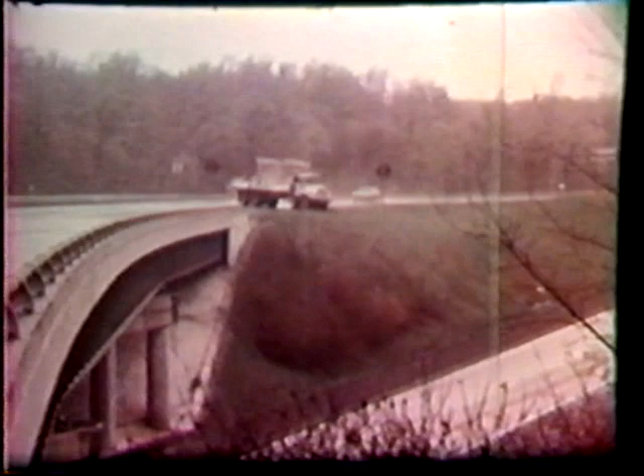Watch the Volkswagen. Now keep your eye on this truck. This could have caused a multi-car accident on the lower roadway. Only great good fortune prevented it. The Public Works Committee wants to know how many other spots there are like this in America. Here's another location and another day. He almost gets run into coming around and getting started again.

These films were taken by professional investigators of the Public Works Committee of the United States House of Representatives. It's our purpose this week to find out how many other places throughout America have these dangerous death traps. They can be prevented by proper engineering of highways in the first place. They can be identified where they exist, and they must be corrected.

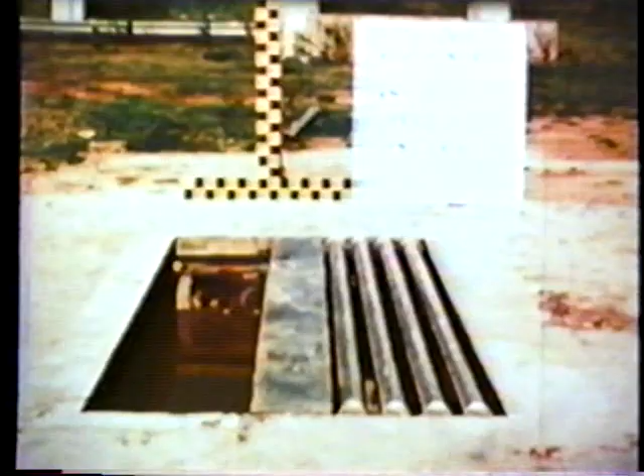This is the tests that were conducted on drainage structure to determine the opening that might be traversed by a vehicle. Here you see the Honda Civic with the 5-foot test pit that was constructed in order to attempt to measure the performance characteristics of various size openings. The 5-foot pit was considered to be sufficiently long for any testing that we might wish to do.

The basic test at this angle is 90 degrees, that was 20 miles per hour and a 24-inch opening. And the Honda Civic sailed over it with no problem at all. No tendency to be unstable, no problem with the wheel snagging in the hole.

So the pit was increased to 30 inches and the test run again. 30-inch opening, 0 angle of attack, head on, 20 miles an hour, and the Honda gets over it again with relative ease. No real problems in jumping over a hole of 30 inches.

So one more try with a 36-inch hole, but this time at 30 miles an hour, because we weren't all that sure of our testing procedure. 36-inch opening at 30 miles an hour. And the performance again was very good.

This is one of the prototype concepts that were included in the test sequence. These are 16-inch openings between 2.5-inch pipes. The 22-inch Honda wheel then might have a tendency to fall in, so we drove it across at 10 miles an hour to see if a serious problem would occur. What if the vehicle were just barely rolling? And you can see that it gets across with relative ease, really no problem in traversing the opening as much as 16 inches. Now that compares to the existing FHWA standard of 12 inches.

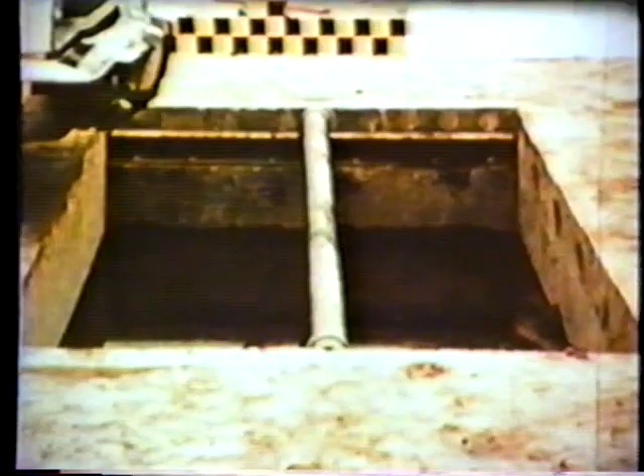This is the large car, which was kind of an afterthought. We had not intended to run the large car simply because we didn't think it would be a serious problem. But to just verify the results that we were getting, we thought we should have the 4,500-pound test vehicle. So this is the 4,500-pound test vehicle at very low speed, and low speed is the more critical speed.

And notice that the action of the vehicle is a good deal more pronounced with the heavy vehicle than it is with the Honda. The difference being the suspension system beneath the vehicle. The softer suspension system of the larger vehicle dropped more quickly, and that in turn created or translated more action to the vehicle compartment itself.

Taking these ideas and translating them to prototypes, this is a roadside pipe 30 inches in diameter, cut to match the side slope with an apron around it for erosion protection. We're going to run the vehicles across this 30-inch opening with 90-degree attack angle to see what effects it might have if there's a serious problem damage-wise.

And this time the 4,500-pound vehicle goes across with virtually no problem at all at low speed. And low speed is typically the more critical case. This is looking down the throat of the system, and the flash is simply film coordination.

You can see the wheel drops very quickly, and the tire does impact the rim on the backside, and there is a loss of tire pressure in one of the tires. But all in all, the driver came across relatively unscathed in the impact. Very modest damage occurs to the vehicle.

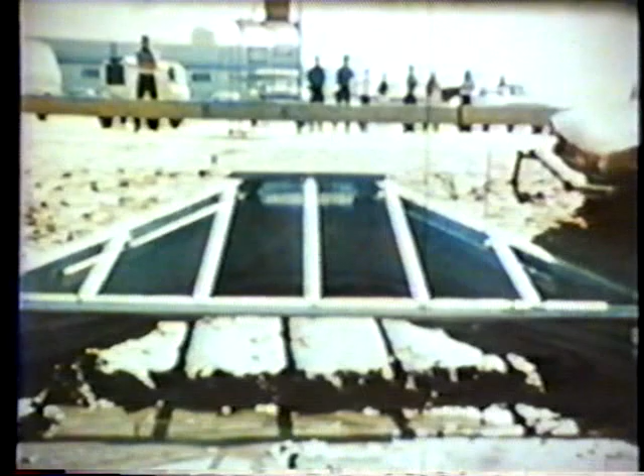We're coming across at 90 degrees with the intent of seeing if the vehicle can survive the impacts of a 30-inch pipe spacing on a relatively extended opening. The speed is approximately 30 miles an hour.

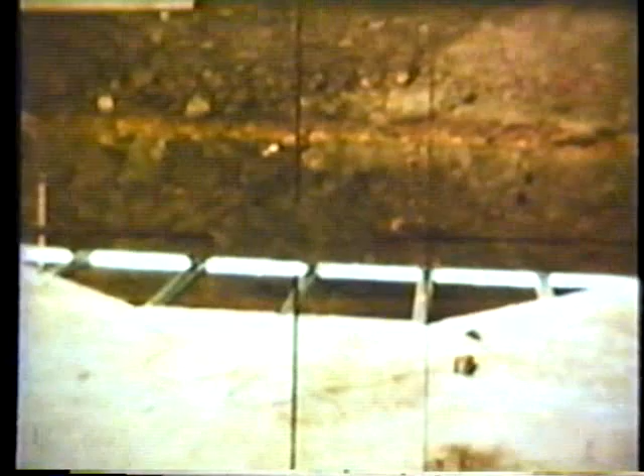This is looking down from the top, and you see the action of the axles as it comes across the system, and by far the most violent action is the rear axle in the process of traversing across the 30-inch openings of the grate.

Same test with the larger car, this time at about 20 miles an hour, and the project requirement was to try to steer back toward the roadway to see if that would have any effect on the traversal pattern. So you notice they've already started counter steering at this point. The vehicle does clear across, but the rim is bent, and pretty obviously the tires are flattened in the process of the traversal.

While that's not the most desirable way to get across, it is certainly safe. And that's the intent, to get away from the stand-up head wall, concrete that we've used for so long, and match the box culvert to the side slope with a grate with large enough openings to provide for passage of most debris, solve the hydraulics problem, and still be survivable by the motorist.

This is the high-speed test of the drop-off situation at the end, just to prove conclusively that it can't work. And it does so very dramatically. As the vehicle drops off of that end, it simply rotates, and when the wheels impact the soil in the ditch, it's tripped and rolled.

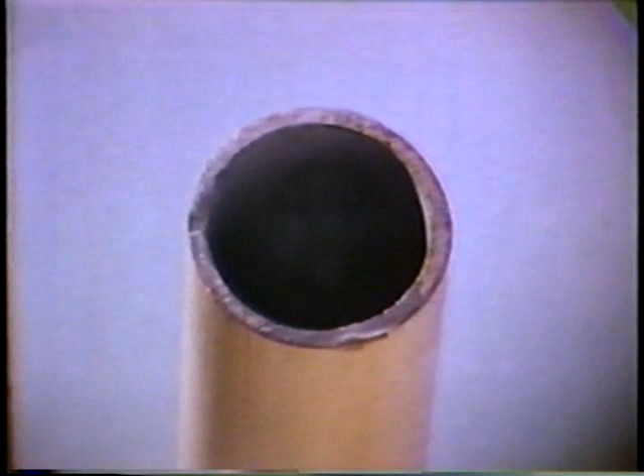A survey was conducted in the initial phase of this study with state, city, and county agencies to determine the state of the practice in small sign supports. Follow-up phone calls and personal interviews were made with selected transportation officials to fill voids in the questionnaire data. The 4 most common types of small sign supports are, in order of use, the steel flanged channel or U-post, wood post, standard steel pipe post, and square steel tube post.

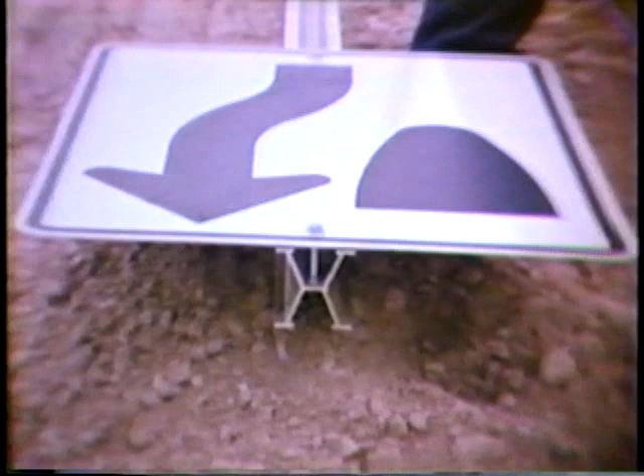Shown here are field installations of the steel U-post, a support widely used by state, city, and county transportation agencies. In some cases, 2 U-posts are bolted together to form a larger support, and these are referred to as piggyback or back-to-back U-posts. Typically, the U-post is driven in the ground either by hand or by powered equipment. Aluminum posts, similar in shape to steel U-posts, are also used to a limited degree. This is a Type X aluminum post.

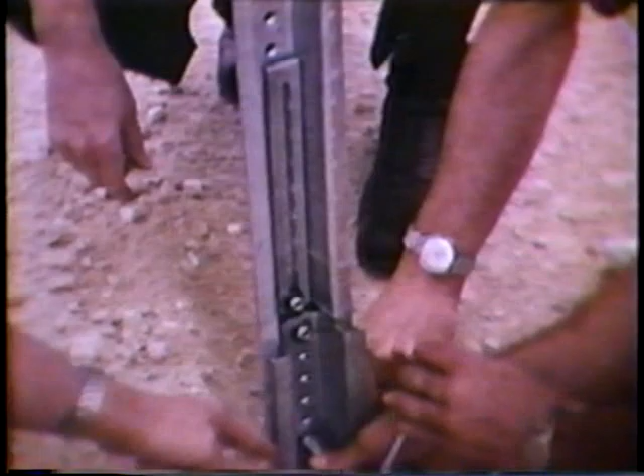A relatively new concept designed for use with steel U-posts consists of a signpost-stub post combination with a bolted base assembly. Installation is accomplished by first driving a stub in the ground. Then the signpost with sign attached is bolted to the stub. This system has an advantage over full-length U-posts in that it can be installed from ground level and requires no special equipment.

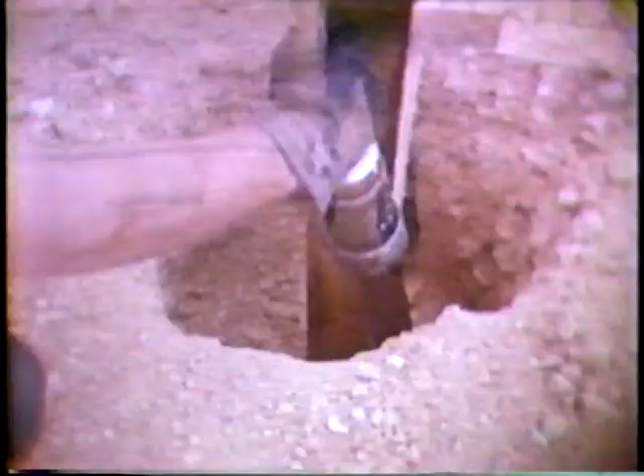Wood posts are widely used by state transportation agencies. Douglas fir and southern pine are the most common types of wood used. Wood posts are typically placed in a drilled hole, and excavated soil is then tamped around the post for embedment. In some cases, wood posts are mounted in concrete footings. In this case, a metal sleeve is used with the concrete footing to facilitate removal of the stub if the post is knocked down. Holes at the base of the post reduce the impact force when the sign is struck by a vehicle.

Standard steel pipe is used by several states and many city and county agencies. Aluminum pipe is also used, but to a smaller extent. Pipe posts are sometimes placed in a drilled hole, and excavated soil is tamped around the pipe for embedment. Pipe posts are also driven, and in some cases are placed in concrete footings. When embedded in the soil, vanes are sometimes welded to the base of the pipe for torsional or twisting resistance.

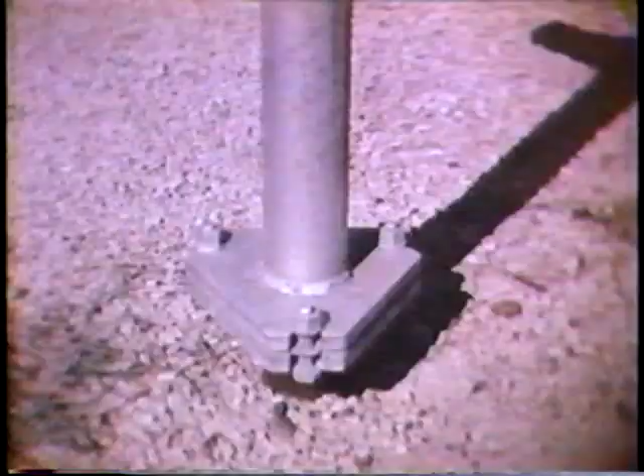The breakaway slip base is also used with pipe posts, and in some cases with square or rectangular tube posts. The triangular slip base will break away irrespective of the direction of impact, while the rectangular slip base is primarily a unidirectional device.

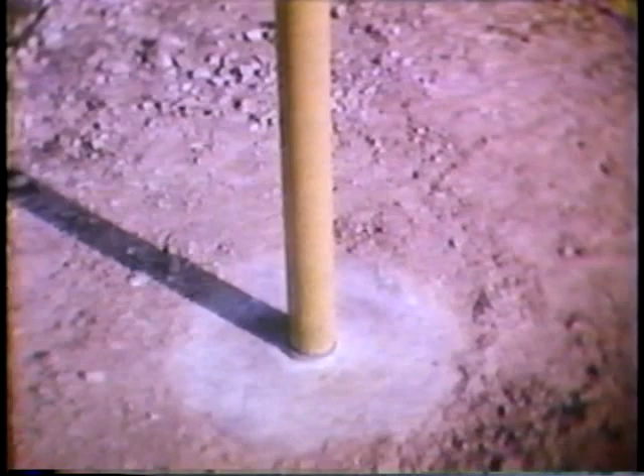Another method which has been successfully used to weaken the pipe post during impact is the so-called pipe collar design. A short pipe stub is embedded in a concrete footing with a threaded pipe collar attached. The threaded base of the signpost is then attached to the collar for installation. The system is designed to break at the juncture of the collar and the signpost.

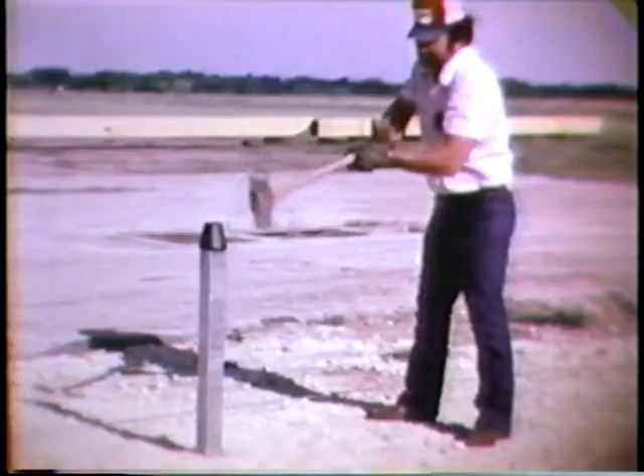Square or rectangular steel tubing has gained wide acceptance in recent years as a small sign support. It is widely used by state, city, and county agencies. Installation is typically accomplished by first driving a stub post, which is larger in size than the signpost. The signpost is then inserted in the stub and held with a fastener. For smaller post sizes, a sleeve is inserted along and on the outside of the stub to provide greater strength at the base of the post. Vehicle impacts cause the signpost to bend and/or break at the top of the stub.

The second phase of the study involved a full-scale crash test program to evaluate the impact hazard of widely used small sign supports and promising new concepts. All installations tested were the single signpost type. In accordance with current guidelines, compact automobiles weighing approximately 2,250 pounds were used as test vehicles. The posts were impacted either 15 inches to the left or right of the center of the front bumper.

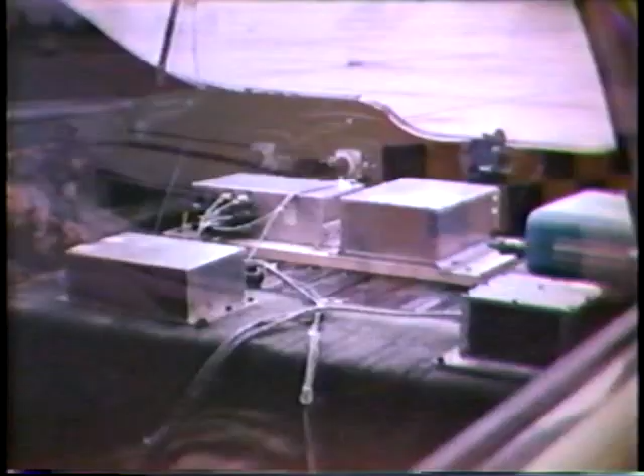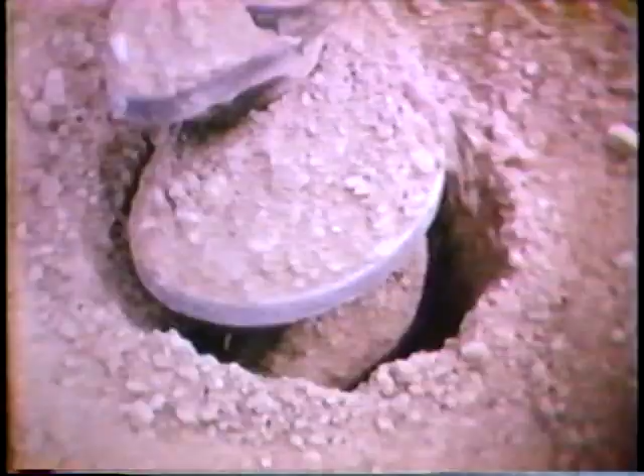Each test vehicle was instrumented for measuring deceleration during impact. Soil at the test site conformed to recommended standards for crash tests. With regard to safety, change in vehicle momentum during impact is the primary factor used to evaluate the impact behavior of a signpost. The American Association of State Highway and Transportation Officials specification states that the change in momentum for a 2,250-pound automobile should not exceed 1,100 pound-seconds, but desirably does not exceed 750 pound-seconds.

This means that the change in velocity during impact should not exceed 10.7 miles per hour, but desirably does not exceed 7.3 miles per hour. Also, after impact, the panel and/or post should not penetrate into the passenger compartment, and the vehicle should remain in a stable, upright configuration. Aluminum sign panels were used in each test. A 24 by 30-inch panel was used with the smaller posts, and a 36 by 48-inch panel was used with the larger posts. The bottom of the panel was approximately 6 feet above ground in each test.

The first series of tests involved full-length steel U-posts. This is a 3-pound per foot rib back post driven 3.5 feet into the soil. It is rolled from billet steel, having relatively high strength and toughness. Tests at 21 miles per hour and 61 miles per hour were conducted. This is the 61 mile per hour test. Note that the post momentarily wraps around the hood of the car, producing significant impact resistance. Change in momentum exceeded the desirable limit.

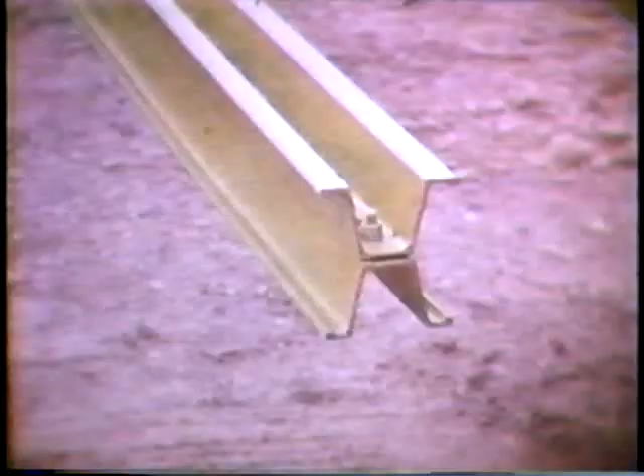Tests were conducted on two 3-pound per foot steel U-posts bolted together to form a back-to-back section. The posts were embedded 4 feet in the soil. This is a 61 mile per hour impact with the rib back billet steel design. Change in momentum was well in excess of the limiting value.

As a consequence of the previous test, an experimental billet steel U-post was produced by a manufacturer of this design. Material properties were changed to reduce the impact resistance. This is a 58 mile per hour impact with the experimental back-to-back post. Much better impact behavior was observed, and the change in momentum was below the desirable limit. Damage to the vehicle was considerably less than in the previous test.

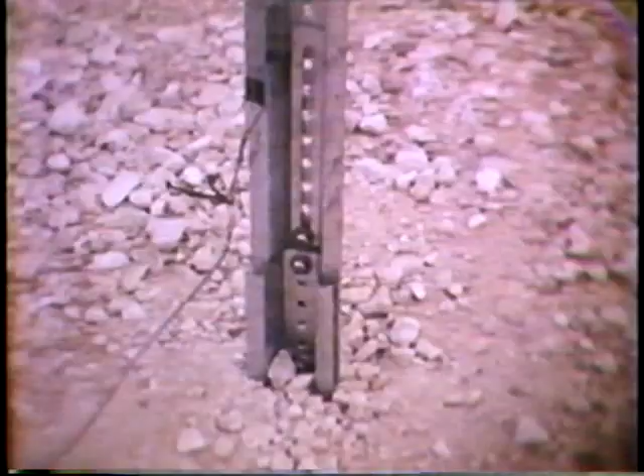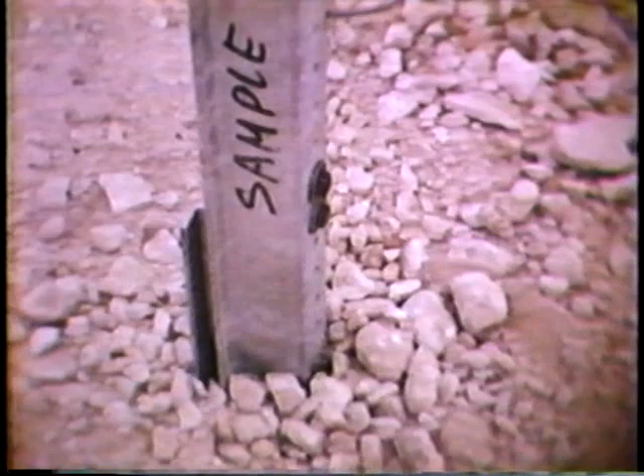Tests of a bolted signpost stub support system utilizing steel U-posts have been conducted by industry. This is a 3-pound per foot rail steel post and stub, and the stub was driven approximately 3 feet. Impact speed was 60 miles per hour. Change in momentum was well below the desirable limit. Other tests have been conducted to evaluate the behavior of the system for low-speed impacts, as well as impacts from the side and rear of the installation. Change in momentum was well below the desirable limit in each case.

Subsequent to these tests, design changes were made in the bolted assembly to reduce damage to the stub. Further tests verified the improved design. Note that damaged posts can be salvaged for use as stubs on other installations.

The final series of tests involving steel U-posts were conducted on a braced leg design. Two 2-pound per foot posts are driven in the ground to form the support system. Tests at 20 and 61 miles per hour were conducted. This sequence shows the high-speed test. Change in momentum was below the desirable limit in this test and slightly above the desirable limit in the low-speed test.

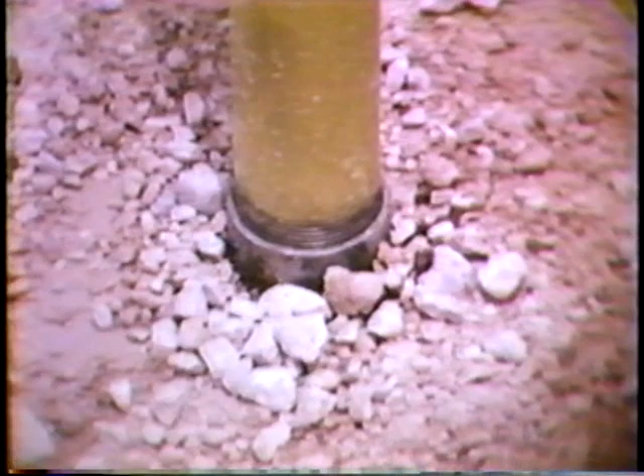Tests were conducted to evaluate a 2.5-inch pipe with a breakaway collar design. In the first 2 tests, the system was impacted at 20 and 63 miles per hour. This sequence shows the high-speed impact. Change in momentum was less than the desirable limit. Note the stub broke just below the collar, and the entire support would have to be replaced.

A minor change was made in the embedment procedure to reduce impact damage. A subsequent test at 20 miles per hour verified the improved design. Change in momentum was below the desirable limit in the 3rd test. With a change in the embedment procedure, the signpost broke just above the collar, and only the signpost would have to be replaced.

The final test involved a square steel tube post. A 2.5-inch square 10-gauge post was embedded in a 3-inch square base. Impact speed was 61 miles per hour. Change in momentum was less than the desirable limit. Damaged posts in this system have salvage value since they can be used as bases for other posts. Recent crash tests of this system by industry have proven it meets current safety criteria for a variety of single post size configurations.

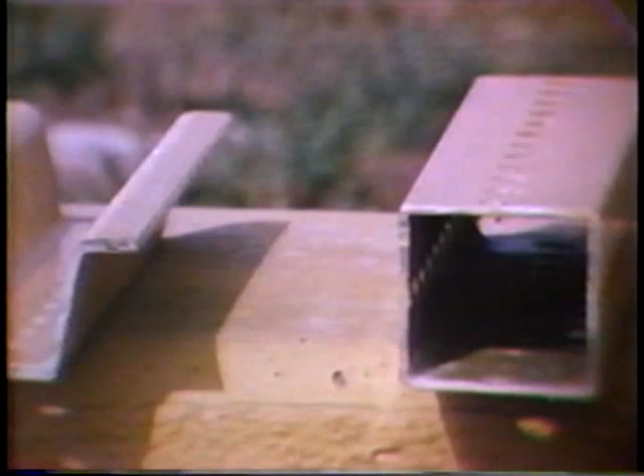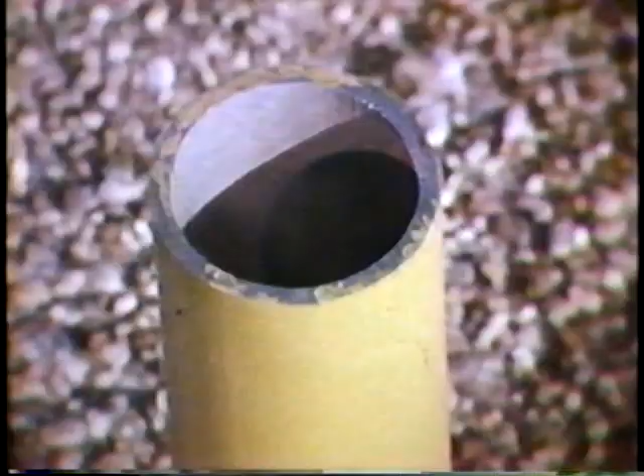In summary, 2 single post systems were found to be unacceptable in terms of current safety criteria. These were 2.5-inch inside diameter and larger standard steel pipe having no breakaway or weakening device, and 2 3-pound per foot and larger billet steel U-posts bolted back to back. Although a back-to-back rail steel post meets safety criteria, it is marginal at best, and a more crash-worthy system should be strongly considered.

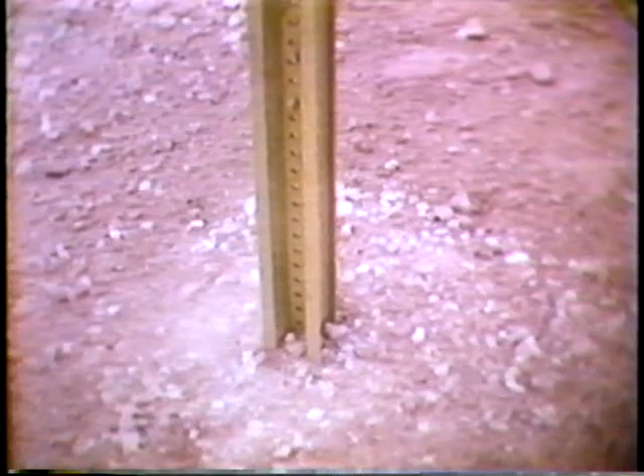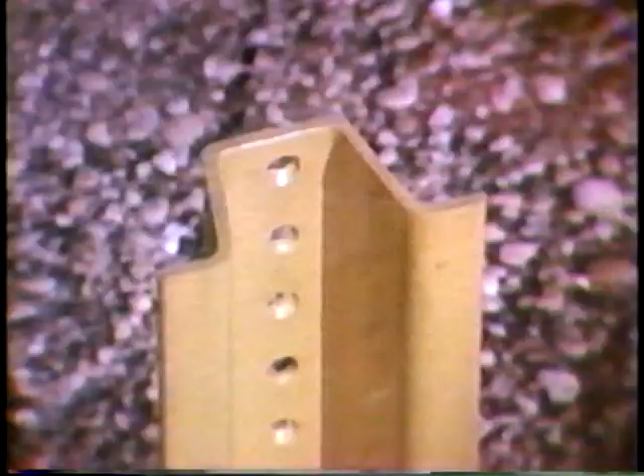2 systems were found to be marginal in terms of current safety criteria. By marginal is meant the change in momentum was above the desirable limit, but below the maximum limit. These were the braced leg design with 2 2-pound per foot billet steel U-posts and the 3-pound per foot full-length billet steel U-post.

Single post systems which satisfied the AASHTO safety criteria included the 3-pound per foot rail steel U-post or its equivalent, the bolted base rail steel U-post system for post sizes up through 4 pounds per foot, wood posts up to 4 by 6 inch in size with no breakaway or weakening device, standard steel pipe up through 2 inches inside diameter in size with no breakaway device, standard steel pipe up through 2.5 inches inside diameter in size with the breakaway collar design, square steel tubes up through 2.5 inch by 2.5 inch 10 gauge in size, and the Type X aluminum post up through the 3X in size.

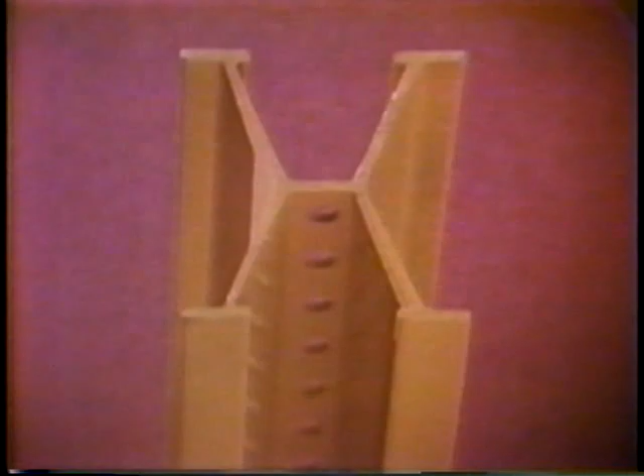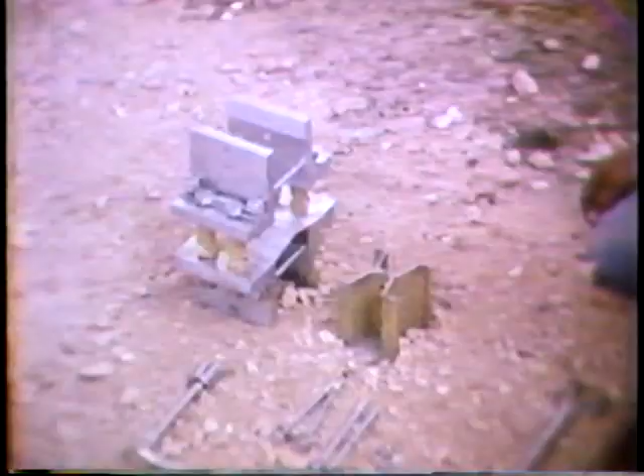Although not tested in this study, it has been proven that the slip-base breakaway design will meet required safety standards for a variety of post types and sizes. Tests have shown that this is another acceptable device which reduces impact severity. It utilizes a coupling and load concentration design which is adaptable to a variety of post types and sizes. It can be used on new installations or can be used to retrofit supports which do not meet current standards.

In the final phase of the study, procedures and guidelines were developed to assist transportation officials in selecting a small sign support system. As outlined in the guidelines, each candidate system should be carefully evaluated in terms of safety, design, and economics.

Regarding economics, the guidelines address the following: initial cost of system, annual cost of components, annual costs to install new systems, annual costs to restore systems damaged by errant motorists, and annual costs associated with maintenance, such as painting of posts. Careful consideration should also be given to manpower, equipment, and expertise needed to install and maintain a system.

Cost effectiveness of the various systems presented is a function of a number of factors. Since many of these factors vary with time and geographic areas, it is essential that selection be based on values applicable to the given locale at the time of the analysis. As you have seen, there are a variety of ways to support a small sign, some obviously less hazardous than others. Some are simply not acceptable.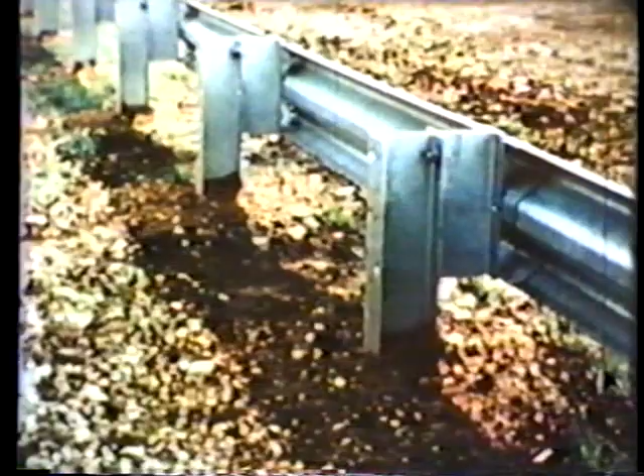This series of tests was conducted to see how barriers perform when they're down on a side slope. The test situation is a 6-to-1 side slope, and the barrier is located 6 feet from the break point. There is a 6-foot berm off of the edge of the concrete, and then a 6-foot run out to the face of the barrier. So the barrier on a 6-to-1 slope is 1 foot lower than the normal configuration. 4,500-pound vehicle, 25 degrees and 60 miles an hour, simply goes right over the top.

And looking at the test situation in high speed, notice that the rail leans back, and as a result of that leaning, the wheel gets on the face of the barrier and it ramps the vehicle up and over. After this test was conducted, a follow-up test at 15 degrees and 60 miles an hour was conducted to see if redirection could be achieved for the normal impact angles. 25 degrees is an extreme angle and would not occur in normal practice very often. So therefore the question boils down to, would we have to go out and replace those barriers on a 6-to-1 slope, or are they relatively functional for normal impact angles?

So this is 15 degrees and 60 miles an hour, the so-called severity test, 4,500-pound vehicle, and we do get redirection, and it was a positive redirection, but a little bit more violent than we would actually desire. We would prefer the vehicle go down the barrier face rather than being thrown back across the traffic stream. Remember, this is the severity test rather than the strength test. The strength test is redirecting the vehicle with no penetration behind the barrier. This particular test is concerned primarily with the forces on the driver. Obviously, penetration or ramping over is not desirable either.

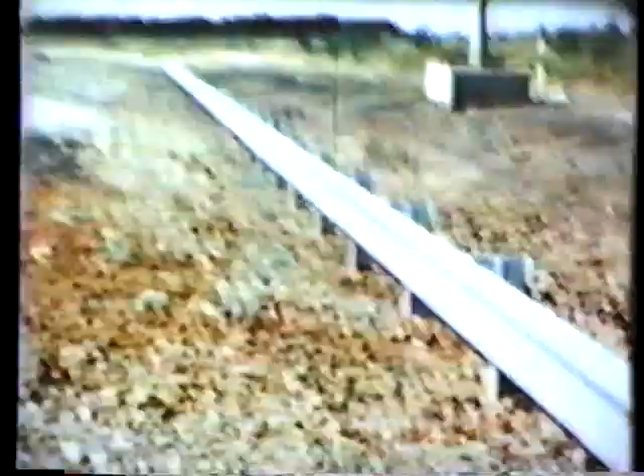Now we've moved the barrier out to 12 feet down on the side slope, or 2 feet lower than would be the normal mounting height at roadway level, and the 25-degree 60-mile-an-hour impact is to take place. The idea was the vehicle is too high when it impacts the first barrier, and therefore moving it out will cause better redirection because the vehicle would be closer to the ground. Notice that a better redirection did occur, but it became a very violent collision, and we will look at this in more detail later on.

At this point you see it is snagged on the rail, and out comes the axle and wheel from the right side of the vehicle, indicating a very severe impact with the barrier. What inadvertently occurred was a 1-foot W-beam section that's designed to go at the intermediate post on the 12-foot 6 rail section was omitted, and the vehicle impacting the barrier bent the W-beam around the blockout and simply cut it in half. The vehicle then snagged on the post and rail end and ripped the undercarriage apart. This demonstrates, I think, conclusively the need for that 1-foot backup section.

There you see one from adjacent post laying on the ground, but the break point did not have that 1-foot backup section. This is a small car with the same basic setup in the 12 feet out from the break point, or 2 feet lower than normal, 15-degree impact at 60 miles an hour.

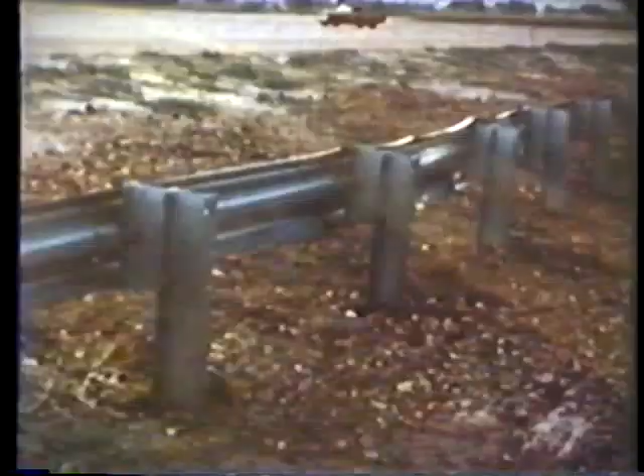This shows you the relative damage to the rail for the lighter vehicles is very modest as compared to the previous damage from the heavier vehicles. Again, the vehicle trajectory after impact was rather extensive, even though the damage to the vehicle was relatively minor. The trajectory problem is a far greater concern than the damage to the vehicle itself.

This is the other idea that we had. If the rail was leaning and causing the vehicle to ramp over the top, then one method of correcting that would be to go to a flexible system. In this case, the cable J-hook roadside barrier. In the concept, the cables are located at 30, 27, and 24 inches above the ground, respectively. The idea is the cable should intermesh with the sheet metal on the side of the vehicle and create redirection.

60 miles an hour, 25 degrees, and notice that we got good redirection down to the time that it impacted the end anchorage. This is not an operational end anchorage, but is an experimental test facility, and the end anchorage was one that provided good tension in the cable. Notice that only one of the 3 cables engaged the vehicle. The other 2 went under the vehicle. But only one cable was necessary to provide the redirection.

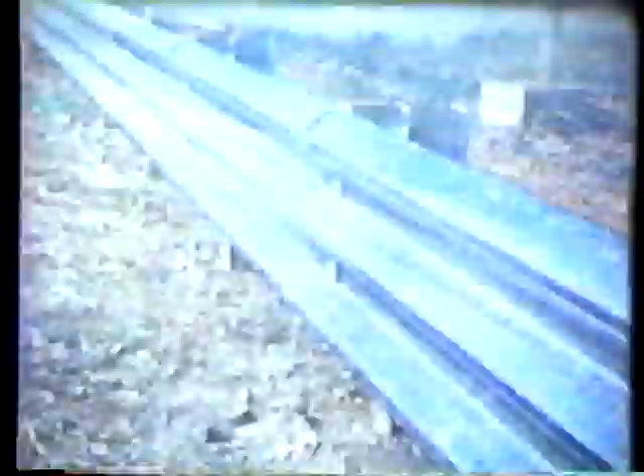This is the Thrie-beam barrier, which is mounted at 32 inches above the terrain and 6 feet off of the basic break. The impact will be with a 4,500-pound vehicle running 60 miles an hour and with an angle of 25 degrees to the barrier. The idea that the taller barrier would intercept the vehicle more effectively and redirect the vehicle was proven to be ineffective. Raising the height didn't solve the problem. Again, if you watch the right front wheel, the barrier leans back, the tire gets on it, and the vehicle simply ramps right up and over it.

So metal beam barriers must be on very flat terrain in order to be effective for the strength test, the 25-degree, 60-mile-an-hour test. The locations that exist on 6-to-1 or flatter are relatively safe. We don't recommend pulling and replacement, but for steeper slopes, it would be appropriate to replace those barriers on the slope as quickly as it's practical to do so. This shows you the damage that has occurred and the ramping action that occurred, and that little bit of lean is all that's necessary to get the vehicle up and over the top of the barrier.

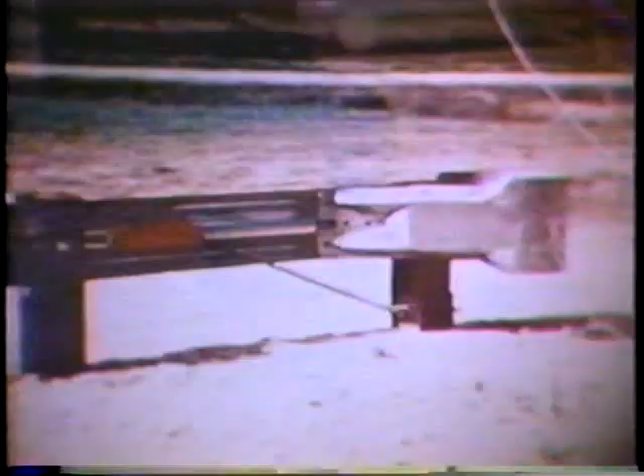Note particularly that the front wheel passes directly over the second post, and as the rail fails to come down, the vehicle right side is elevated and rollover occurs. The BCT was designed to try to eliminate this particular problem. The concept was a relatively weak beam supported tensile strength-wise by a cable coming down from the rail through the first post. On frontal impact, the post would break, the cable would be released, and the rail would buckle in front of the vehicle as a crash cushion.

Here you see that action. Low speed impact with a small car, the post does break away satisfactorily, and the W-beam buckles in front of the impacting vehicle. Damage to the vehicle was moderate. This is a high-speed crash with a large vehicle with the same system. And notice that rollover does occur. The force required to buckle the rail, plus the leaning action of the second post, resulted in the rollover very similar to the Texas twist design.

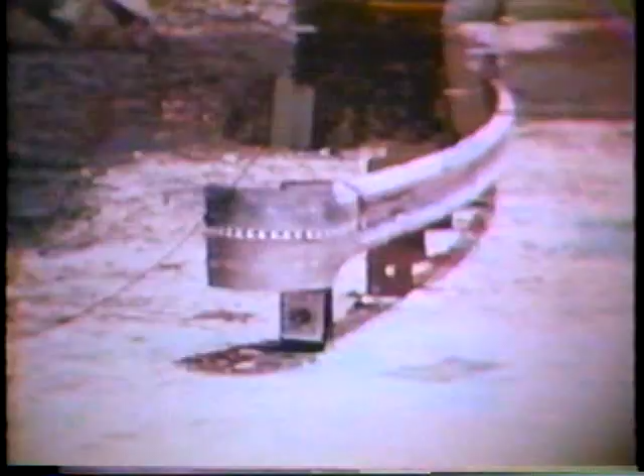Modifications of the system were made to include a hole in the second post, and the washers were removed on the second through the seventh post to eliminate the problem associated with the rollover that was observed before.

After the basic design was worked out, several high-speed crash tests were conducted with both steel post and wood post systems to determine the behavior of the end in high-speed impacts. And here you see the basic action of one such crash test in which the front quarter panel and door were ripped off of the vehicle as impact occurred. While undesirable, this impact was considered to be marginally safe. Much safer than penetration of the passenger compartment by the stand-up rail, as we saw earlier. Damage to the vehicle was very severe, and the decelerations on the passengers and occupants were marginal.

Variations in the system were then attempted to determine if we could eliminate some of the problems associated with it. And here we see a second test. The situation is a little less severe than had previously been noted. Again, the peeling action does take place. The right quarter panel is taken off, but the door remains intact. A little more rolling action than was observed in the previous test.

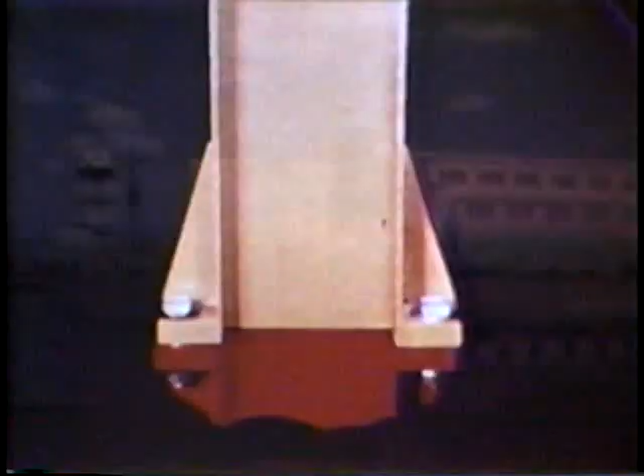Once aware of the problem, engineers were quick to develop effective solutions. Where hazards could not be removed, they were made to break away or were shielded with a positive barrier. When it was not possible to eliminate or otherwise treat a hazard, another approach was necessary. This led to the development in the late 1960s of highway crash cushions. Crash cushions are impact-absorbing devices which allow motorists to drive away from otherwise fatal accidents.

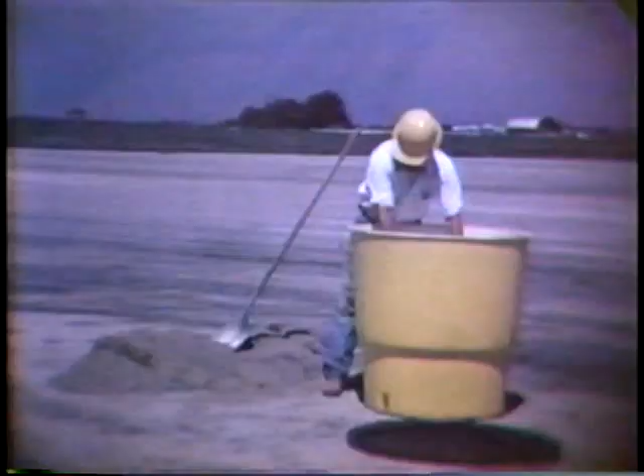The earliest crash cushions, or impact attenuators, consisted of rows of metal drums, specially weakened to crush on impact. Another type, an array of sand-filled frangible plastic barrels, was designed to dissipate the energy of an impacting vehicle through momentum transfer as the sand was displaced. Many of these early systems continue to provide life-saving service.

Still another variation employed clusters of water-filled vinyl tubes which dissipated impact energy in a controlled fashion as water was forced out through the top of each tube. The principle of water-filled tubes was expanded to become the hydro-cell sandwich system. On impact, kinetic energy is gradually dissipated through the release of water in the tubes and the compression of the hydro crash cushion.

This system is particularly useful in protecting wide hazards at gores, exit ramps, and bifurcations. The hydro system is also effective in safely redirecting vehicles which strike the unit from the side. Since the system is reusable, maintenance and repositioning are simple and inexpensive. Only the water expended in the crash must be replaced.

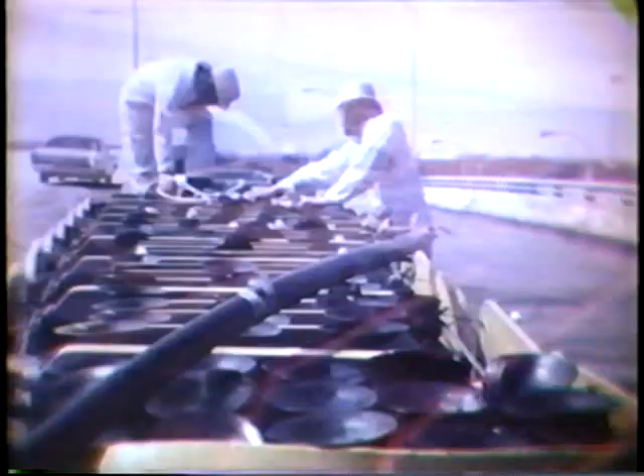The many narrow obstacles which exist along the nation's roads present quite a different problem. In order to shield these hazards, a specially designed system called the Guardrail Energy Absorbing Terminal, or GREAT, was developed. The GREAT system employs an expendable energy-absorbing cartridge in a metal framework of triple corrugated guardrail sections.

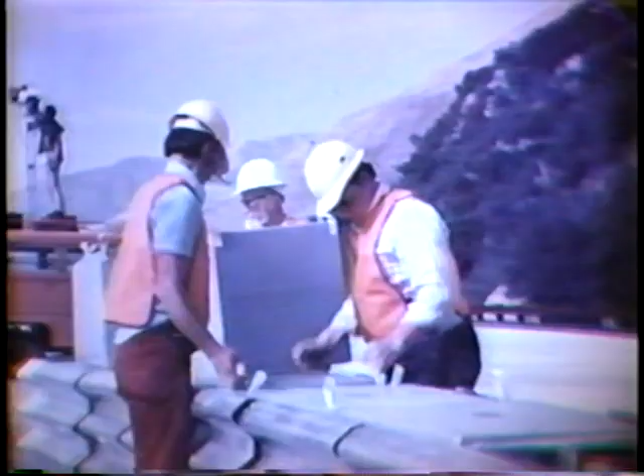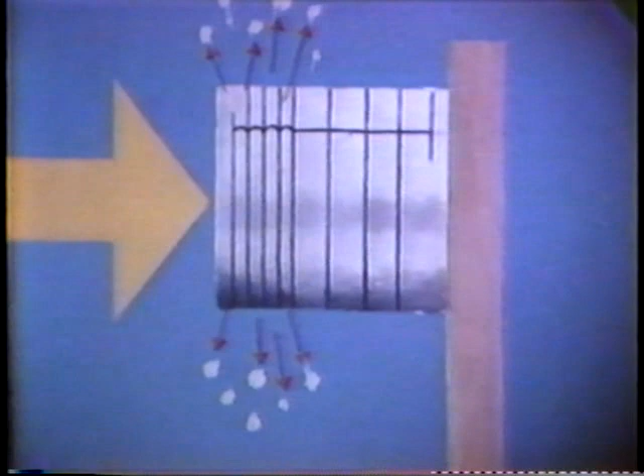When the unit is struck, its soft plastic nose molds to the front of the impacting vehicle, and the unit telescopes inward as the energy-absorbing cartridges are crushed. Expended cartridges are quickly replaced with new ones, and the unit is brought back into service. The first GREAT cartridges consisted of vermiculite concrete cells placed in a removable container. As the cells were crushed, the kinetic energy of the vehicle was converted into work, resulting in a controlled, safe stop.

In response to the growing number of smaller cars with extra sensitivity to crashes, a new energy-absorbing medium has been developed. Called hex foam, the new medium consists of a honeycomb matrix of hexagon-shaped cells filled with polyurethane foam. Layers of hex foam are encased in a polyethylene shell.

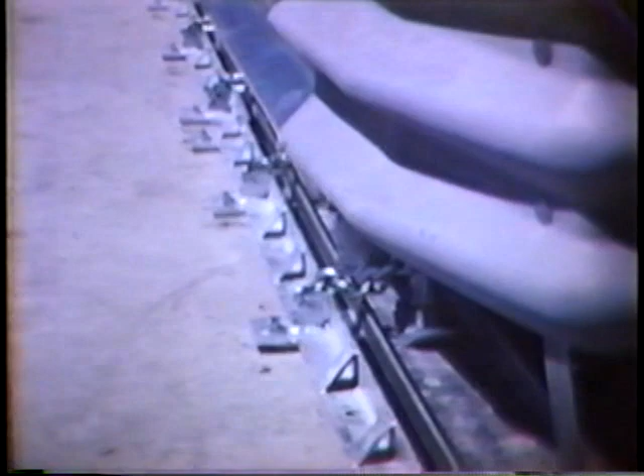In addition to solving the problem of shielding narrow roadside hazards, the GREAT system has been modified to offer protection in highway construction and maintenance zones. The construction zone GREAT has been adapted so that it is portable and can be moved along as construction progresses.

Still another development has resulted from the need for better safety for workers and motorists in construction and maintenance zones. The truck-mounted attenuator, or TMA, employs the lightweight hex foam cell as its energy-absorbing medium. Attached to a shadow truck, the TMA shields workers from passing traffic. Since the TMA is able to bring an errant vehicle to a controlled, safe stop, both the motorist and the highway worker are protected by its life-saving presence.

Whereas crash cushions are effective in dissipating the energy of impacting vehicles, other devices have been developed to aid motorists in avoiding hazards in restricted traffic areas. Portable electronic changeable message signs are being used throughout the United States to provide motorists with clear, bright traffic advisory and safety information.

More forgiving highways are being achieved through continuing research programs, products from innovative companies such as Energy Absorption Systems, and the willingness of highway engineers to adapt new techniques in the spirit of improving highway safety.

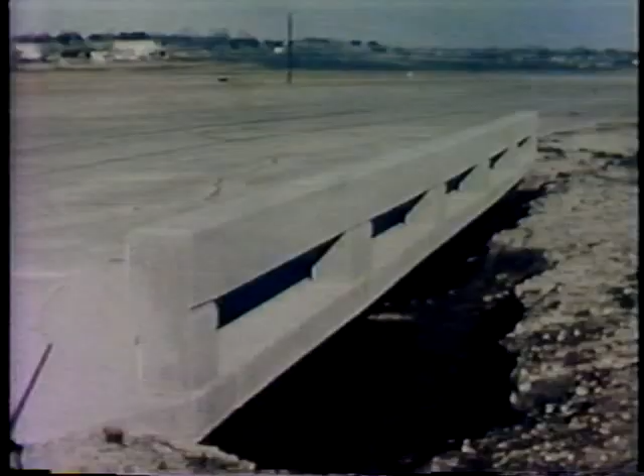A series of full-scale crash tests of bridge rails and guardrail to bridge transitions was conducted in 1984. The tests were generally conducted at the high side of the standard testing criteria. You will see that the results were severe and disturbing. These results indicate that the majority of existing bridge rails and transitions are structurally and/or functionally inadequate. These tests further demonstrate that performance standards for roadside appurtenances should be established and that testing should be conducted to assure that an approved design will function adequately.

This test is on a type of concrete bridge rail. An open joint in a post in this concrete railing allows the test vehicle to snag on an undeflected railing end. Our test vehicle weighs 4,600 pounds, is traveling at 60 miles per hour, and impacts at 25 degrees. Here we see where the test vehicle hit the railing, then slid along the rail until it snagged on the undeflected end of the next open joint.

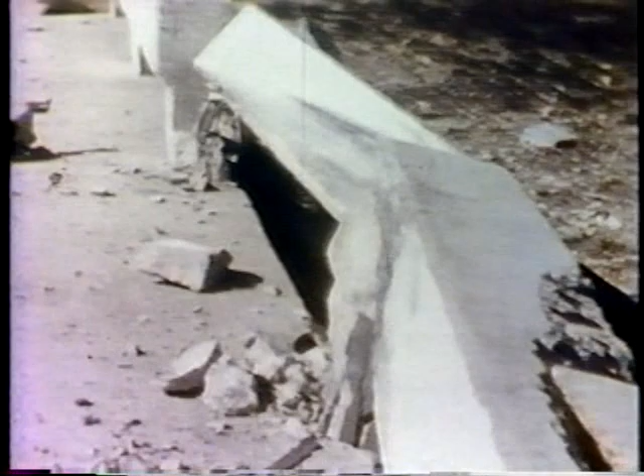This railing is undesirable from a safety standpoint. If it had met bridge specification requirements for structural continuity, acceptable redirection might have occurred. Now we look at a galvanized steel railing. The 42-inch high railing meets the AASHTO bridge specifications.

The 4,700-pound car is moving at 60 miles per hour at a 25-degree angle to the railing. Watch how the open section of the rail at hood height results in the hood snagging on the post and being driven through the windshield into the passenger compartment.

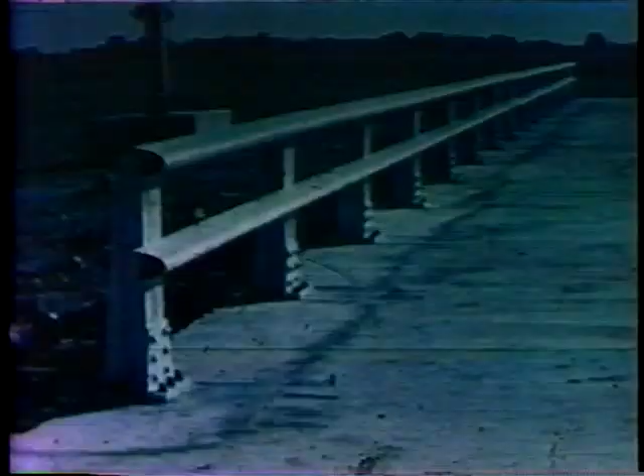Designs similar to this aluminum railing are popular in some states. The 4,700-pound test car impacts the railing at 25 degrees and 60 miles per hour. This fourth bridge rail is similar to the previous one. It does not meet AASHTO specifications because the lower rail is 4 1/2 inches too high.

Here, the 1,950-pound test vehicle is traveling at 60 miles per hour and strikes at 15 degrees. Upon impact, snagging of the wheels and sheet metal on the post occurs due to this high rail, causing the car to yaw until it rolls over.

This tubular tri-beam railing successfully redirects our 1,900-pound test car moving at 60 miles per hour and a 20-degree angle. The bridge rail in this test consists of a W-beam backed up by 2 box beams.

The test vehicle weighs 4,500 pounds, is traveling at 60 miles per hour, and impacts at 20 degrees. Upon collision, the posts break away, minimizing the potential for snagging. But more importantly, the tensile continuity of this rail makes this system work.

The bridge railing in this test is the experimental CERB self-restoring barrier system. The 4,800-pound car is traveling at 60 miles per hour at a 25-degree angle and is successfully redirected. Note the tilting lever support arms that allow the barrier face to move up during impact and then return to its original position.

This safety-shaped concrete barrier has an aluminum rail bolted on top. The height of the concrete parapet is 27 inches and the aluminum rail is 12 inches high.

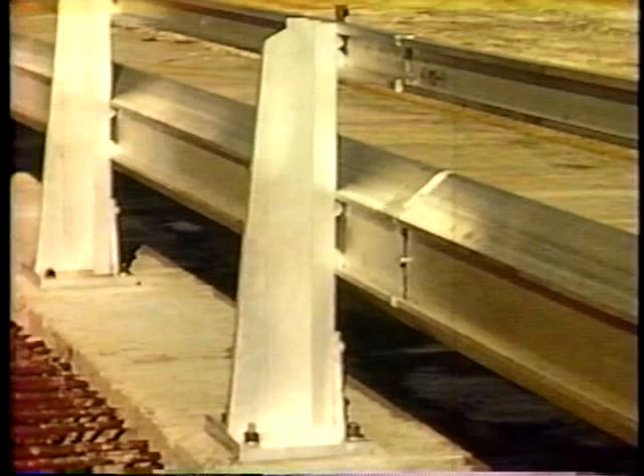This is a test of the aluminum industry's answer to the problems encountered with the first of the aluminum railings shown earlier. Although modification of the base plate and some connection details substantially strengthen the post over the earlier version, it is still below the specification strength requirements.

Our test vehicle strikes the rail at 60 miles per hour and 25 degrees. We have successful redirection. Despite two of the posts breaking away, continuity of the rail allowed this system to perform satisfactorily.

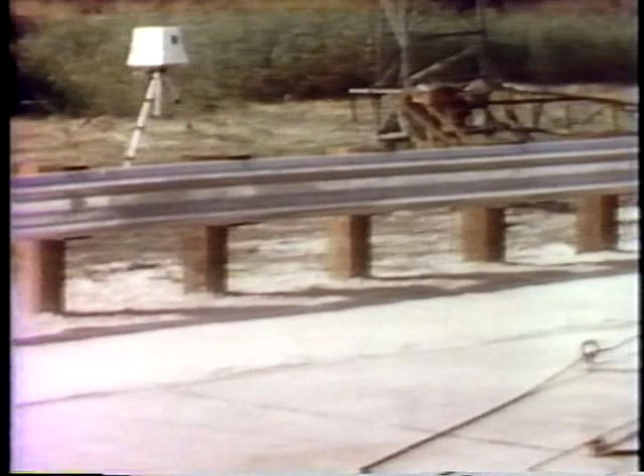These last two crash tests are of typical transitions from guardrail to bridge parapets. The test conditions in both tests were the same. Note that there is no offset between the concrete wall and the W-beam rail.

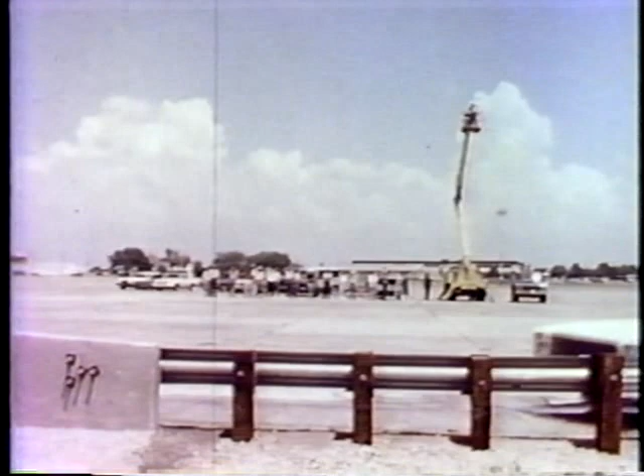The test vehicle weighs 4,600 pounds and strikes the rail at 60 miles per hour at an angle of 25 degrees. The guardrail deflects, forming a pocket which guides the test vehicle into the concrete barrier end, resulting in a very violent collision.

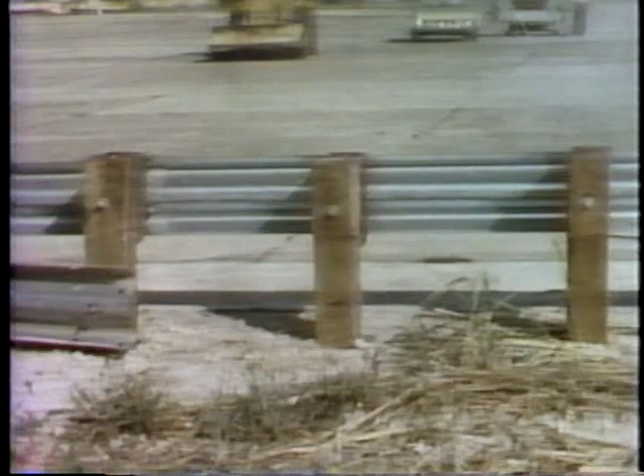This last test is a retrofit of the previous transition design. Two more posts have been added, so now the first 4 posts from the concrete barrier are spaced at 1 foot 6 inches, thereby stiffening the transition. Also, a W-beam rub rail, 12.5 feet long, was added and tucked behind the post.

Again, we have a 4,600 pound car striking the rail at 60 miles per hour and at a 25-degree angle.

While the results are considered a success, note how the W-beam deformed at the end of the parapet and how the concrete parapet cracked.

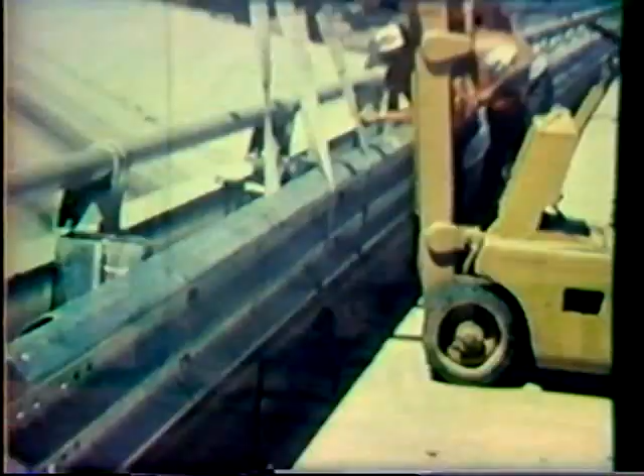Most railings designed to previous and current criteria have not been crash tested. Some are known to have deficiencies. Bridge rail upgrading is part of an overall safety improvement strategy and can be considered as part of reconstruction or rehabilitation projects.

In 1979, over 700 fatalities were attributed to vehicles crossing a bridge. Accident statistics indicate that injury severities increase significantly when vehicles penetrate through or vault over bridge railings.

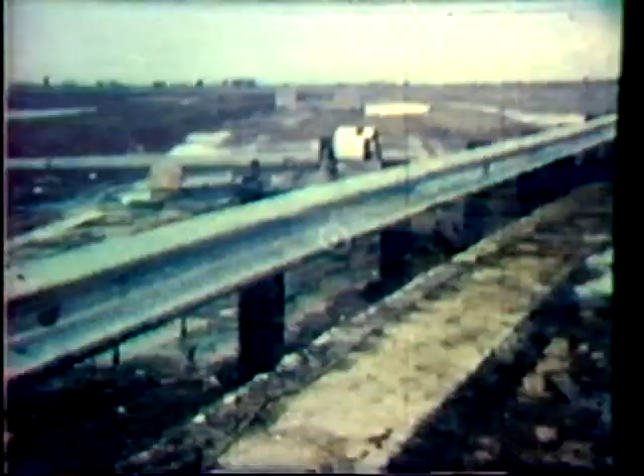Deficient bridge railing systems can be identified from adverse accident experience. Common railing deficiencies include insufficient strength resulting in penetration, beam post deflection incompatibility resulting in wheel snagging, and curb safety walks which may cause vaulting.

Besides low initial and maintenance costs, characteristics of a satisfactory bridge railing include forgiving redirection for occupants in a wide range of vehicles, including the growing number of small cars, adequate strength and geometry, beam and post deflection compatibility, and railings compatible with curbs and walks.

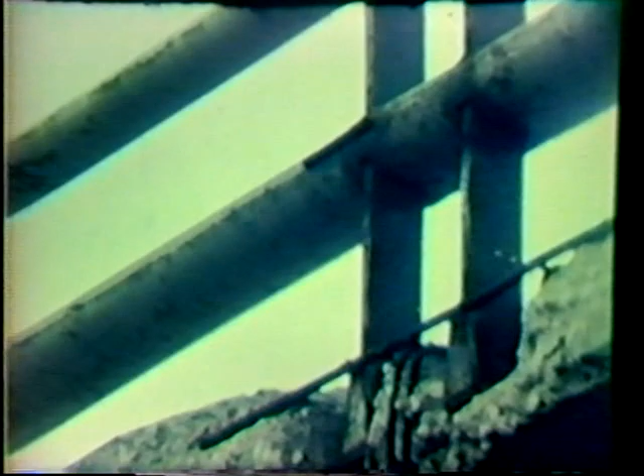A comprehensive survey conducted for the Federal Highway Administration in the mid-1970s identified 3 bridge railing categories as prime retrofit candidates. The first retrofit category consists of a metal railing system installed on a flush deck or low curb less than 6 inches high. The second retrofit category is a concrete baluster or parapet, with or without metal railings on top. Deficiencies noted in these systems include lack of adequate strength and wheel snagging at railing openings.

The third category concerns bridges with a metal rail or concrete parapet on a high curb or walk. 1 to 3 rails may be installed on the parapet. This railing category is further defined as narrow walks less than 2 feet wide and wide walks greater than 2 feet. The raised walkways have caused vehicle vaulting.

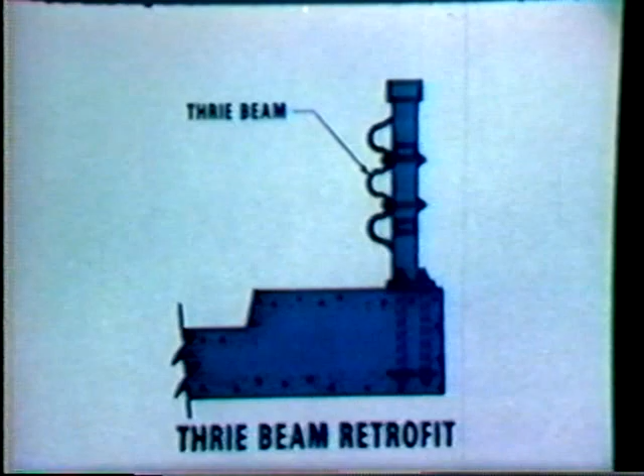Presently, there are a number of upgrading design alternatives. Single thrie beams were evaluated by New York State for effectiveness in providing continuity across undesirable open joints of a flush deck metal railing system. A box beam design also has been tested by New York for upgrading this railing. These retrofitted railings have been evaluated for full-size car containment.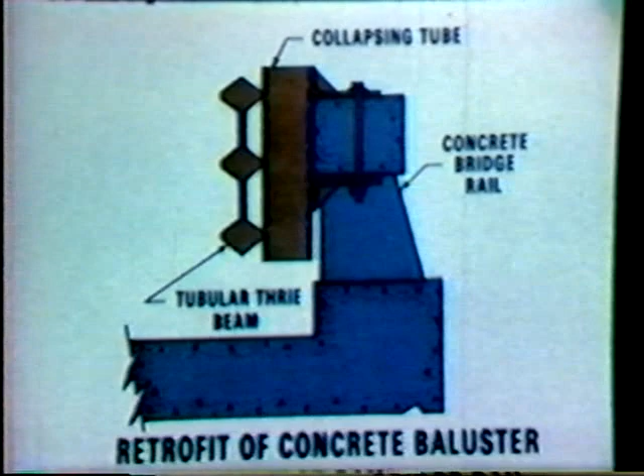One upgraded system was tested for the baluster category, a tubular thrie beam mounted on deformable spacers. This retrofit distributes impact forces over a large area as the spacers deform, thus reducing vehicle occupant injury potential while increasing the capacity of an existing railing. The 20-inch deep thrie beam provides geometric compatibility with a wide range of vehicles.

A standard full-size car test was conducted on the baluster system. Fracturing of the railing and posts occurred. The car was smoothly redirected by the upgraded system with no damage to the baluster railing. Crash tests also provide a comparison of the existing and retrofitted railing performance with a subcompact vehicle.

The upgraded system in the narrow walk category had a 10-inch high walk that was 16 inches wide. As reported from the field, vehicles have vaulted over or through the metal railing on top of the parapet. Two baseline crash tests were conducted on the existing design. In the full-size car test, the vehicle was contained and redirected. However, there was considerable damage to the system. The standard subcompact test resulted in vehicle redirection, although some wheel snagging occurred at one of the metal posts.

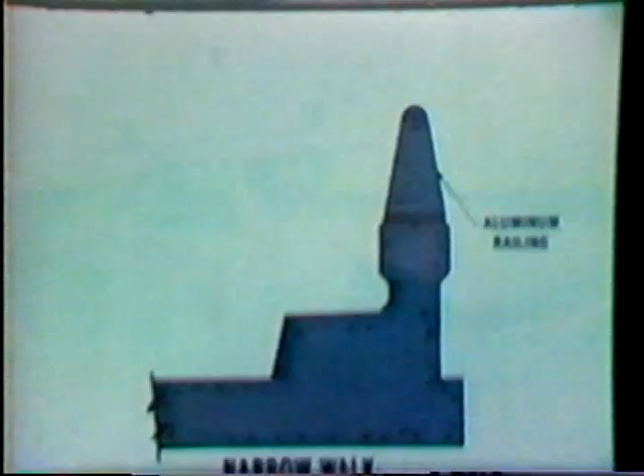Three different retrofit designs were crash tested for the narrow walk category. The rigid aluminum retrofit system for this category features a spacer which distributes the loads from attached beams to the parapet. The beams are installed in line with the face of the curb, thus reducing the possibility of vehicle vaulting. The full-size car test with the aluminum retrofit resulted in smooth redirection with no significant barrier damage. Some sheet metal snagging occurred at one post. The subcompact car was driven from the scene after the test.

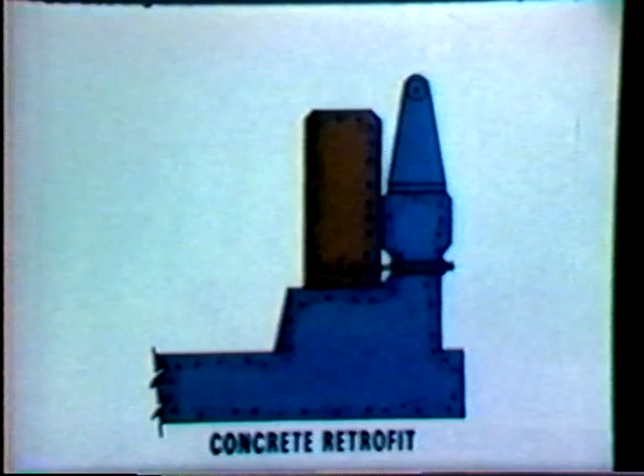A concrete beam installed on top of the safety walk provided another retrofit alternative. This upgraded system resembles a shaped concrete parapet. The additional dead load should be considered. A shallow 12-degree angle test was conducted with a full-size sedan. A subcompact test of the same system.

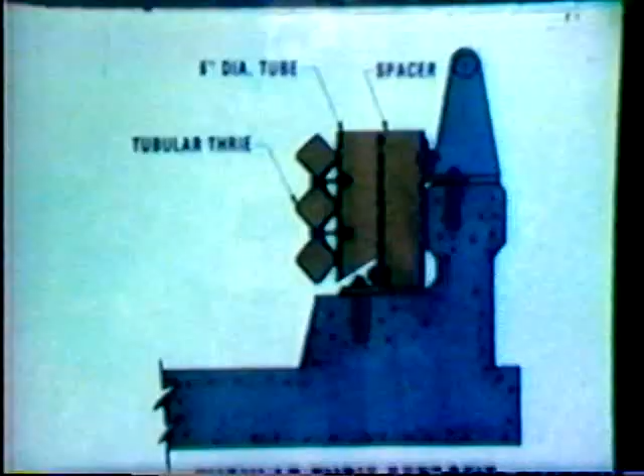A tubular thrie beam system with crushable tubes was installed with the narrow walk system. The beam face was in line with the curb. The subcompact test of the tubular thrie beam system resulted in smooth redirection. A full-size car test resulted in containment and redirection. Two crushable tubes were compressed, and there was no damage to the existing parapet.

Tests of the tubular retrofit with heavy buses resulted in tripping of the vehicles at the rigid walk face when the beam deflected. This tripping caused the buses to roll on their side after 60 miles per hour, 15-degree angle impacts. An improved retrofit design for heavy vehicles was developed by moving the beam out 3 inches and up 6 inches. Subsequent crash tests with a 40,000-pound intercity bus and an 1,800-pound mini-compact at 60 miles per hour and a 15-degree angle produced desired results.

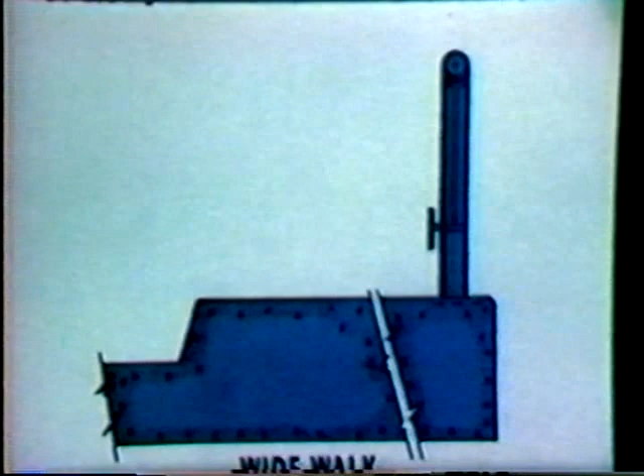The system selected for upgrading the wide walk category featured a 9-inch high by 5-foot wide safety walk. The steel panel type railing primarily functioned as a pedestrian railing. The baseline test of the existing system was conducted with a full-size car. The vehicle was launched over the walk and went through the railing until it contacted the downstream concrete end post.

The upgraded system featured specially designed posts mounted near the traffic side of the walk. A tubular thrie beam was connected to the posts in line with the curb face of the walk. The subcompact test resulted in smooth redirection. Vehicle damage was minimal.

The full-size car test illustrates the flexibility of the tubular thrie beam in redirecting the vehicle energy. The specially designed posts required no costly deck damage repair after this severe impact.

Spectacular accidents have occurred at curved off-ramp structures. Concrete safety shapes and tubular thrie beam upgraded systems have been proved effective in off-ramp collisions for vehicles ranging from a 20,000-pound school bus to a mini compact car.

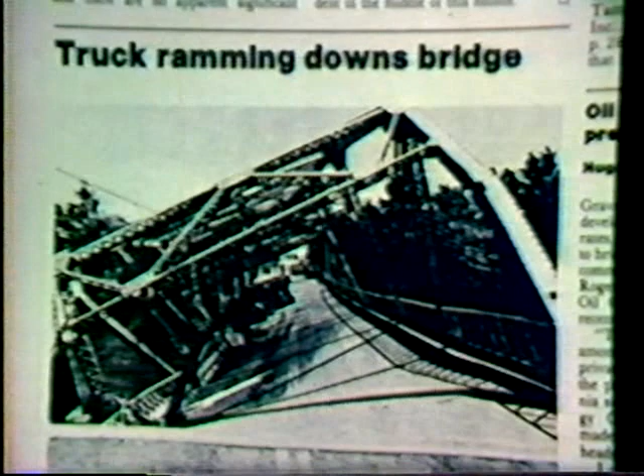Trucks, buses, and cars have caused collapse of through truss spans by impacting critical truss members. Through truss bridges require a rigid railing that limits large vehicle roll. A tubular thrie beam railing system with a secondary 5-foot high railing was successful in excluding from the truss member zone a 20,000-pound bus impacting at 55 miles per hour and 15 degrees.

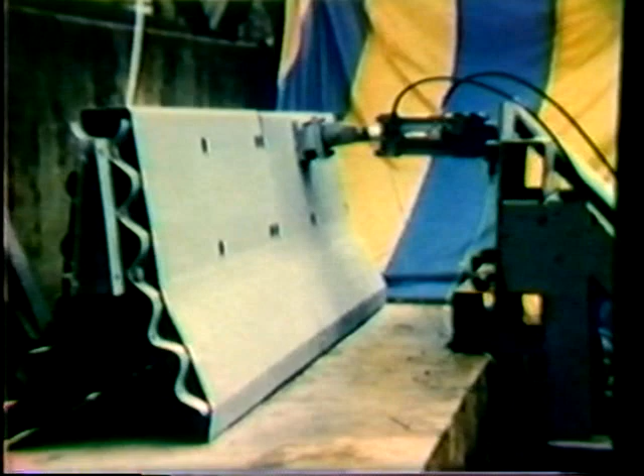Metal safety shapes have been installed on existing bridges which could not accommodate the dead weight of concrete safety-shaped retrofits. Injuries are more severe in bridge end accidents than in bridge rail accidents. This is attributed to the incompatibility of conventional approach guardrail with traditional rigid bridge railing systems.

Most of the upgrading accomplished to date has involved the physical attachment of the approach guardrail to the bridge parapet. The post spacing near the bridge is usually reduced for stiffness transition. A recent study by the state of California identified bridge approach upgrading as one of the most cost-effective safety improvements possible.

Development of the retrofit systems in the FHWA upgrading project included full-size car test evaluation of bridge approach designs. The beam elements used in the bridge railing upgrading were extended beyond the structure and transitioned to a conventional approach guardrail system. The flush deck railing upgrade by New York featured a tri-beam bridge approach railing. The approach system was proved compatible with the upgraded bridge railing.

For the parapet approach, the tubular tri-beam was carried one post span beyond the bridge and then spliced to a single tri-beam element. The vehicle was smoothly redirected. The narrow walk aluminum retrofit used the same bridge approach beams across the structure. Redirection was accomplished, although wheel snagging at the exposed walk end was sufficient to strip the wheel from the test vehicle.

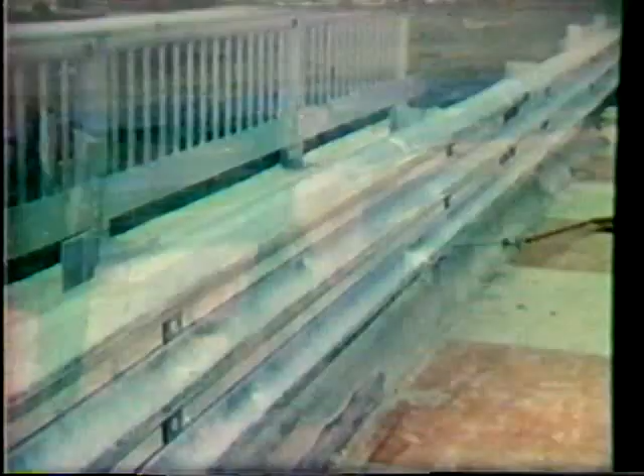The tubular tri-beam was extended beyond the wide walk structure and spliced to a single tri-beam. Results of the test were successful. There is a need to upgrade obsolete bridge railings. Accident experience with a given railing system can assist in identifying this need. Approach railings must be compatible with the bridge railing if the bridge end problem is to be improved. Transition designs have been developed for most of the upgraded systems discussed.

There are a number of retrofit systems available for immediate implementation. Several states have significant numbers of tubular tri-beam upgraded projects. For research reports and further information, contact the FHWA office in your state.

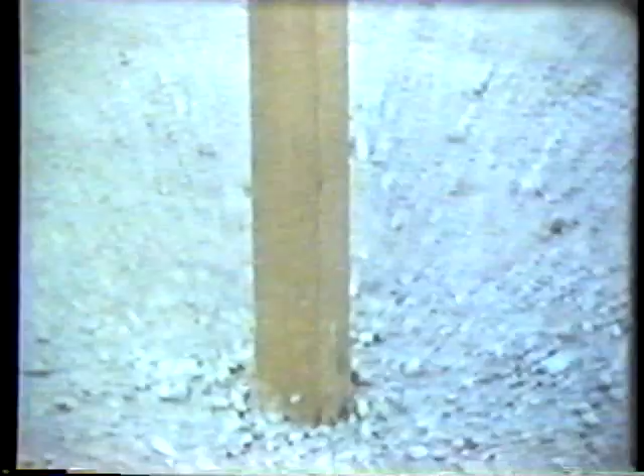This film is of a multiple mailbox system. We have 4 mailboxes sitting on a single rail supported by a single post. In single mailbox situations, the mailbox typically hits the windshield and bounces over the vehicle. But with multiple mailbox situations, the rail supporting the mailboxes is a critical concern. Here is a 60-mile-an-hour crash with a smaller vehicle.

At normal speed, you don't see the seriousness of the problem, but at slow speed it becomes evident. 3 of the 4 boxes go directly into the passenger compartment, with 1 going over the top. Since mailboxes must be located right at the window level, this becomes a very great concern.

The methods of eliminating this particular behavior pretty much revolve around making the post system, support system, U-shaped so that the bumper impacts the rail on the front end and pushes it away from the vehicle rather than coming into the windshield as you saw in that test example. Very serious consequences. The driver obviously is in a very serious circumstance when such impacts occur. While these are relatively small numbers of incidents, they do result in several hundred fatalities a year on mailboxes across the country.